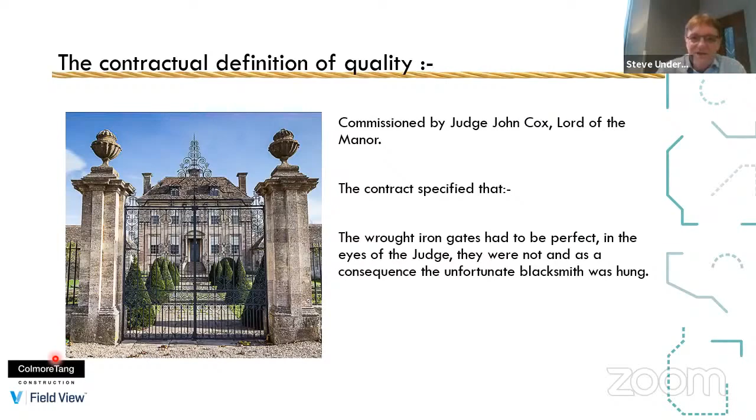So from my perspective, the real issue sits here, and that's this: the guy holding the hand tools that actually builds the product is where quality and compliance sits. And there's the old phrase, the hand that rocks the cradle is the hand that rules the world. Well, I say the hand that holds the drill, all the tools, is the guy that really calls the shots when it comes to the quality assurance piece.

And if we think about the cladding crisis and the things that have started the golden thread, a lot of it is to do with quality of workmanship actually on the work face. And we can all talk about everything being done for the lowest price and people cutting corners and bits and pieces, and we'll come back to that in a bit.

But really, I believe that the quality and the golden thread exists at the workplace and not as a load of technical documentation. So back in my day, as a young site manager, I used to quite often go in on a Saturday morning, as most site managers did, and catch up with the paperwork. And I remember going into the office where the site engineer was, and he had inspection and test plans all over his desk, mainly for concrete, to be fair.

And on Saturday morning, he was busy filling in his ITPs. And these were pre-pour ITPs and post-pour and all the bits and pieces that go with it. So the entire quality assurance piece was just a straightforward tick box exercise. And this was kind of born out of the BS 5750 era, when everything was a check sheet. And the only thing that actually got done was the check sheets got ticked, but nothing got checked because everybody was so busy filling in the check sheets.

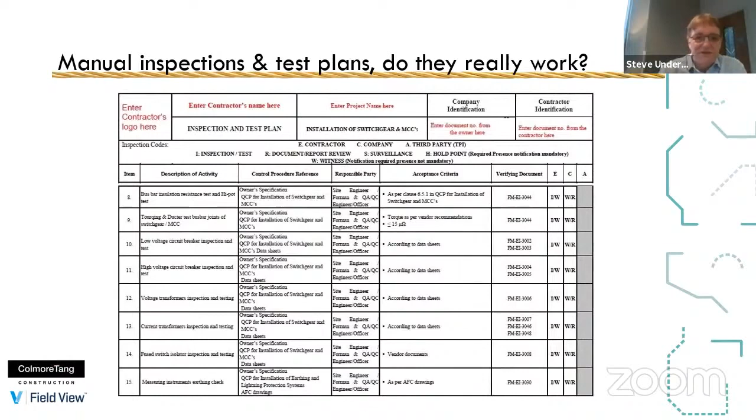And that was that. So how do we kind of move on from a check sheet philosophy to something that actually works, that means something to the guys on site? So if you think of any process, here's my alternative to 3 steps to heaven: you have to define what it is that you're going to do.

You then have to produce an algorithm, and it needs to be a visual flowchart so that everybody can understand it, because communicating what you're trying to achieve is as much the problem as anything else. From that, you can develop your inspection and test plans and define the hold points.

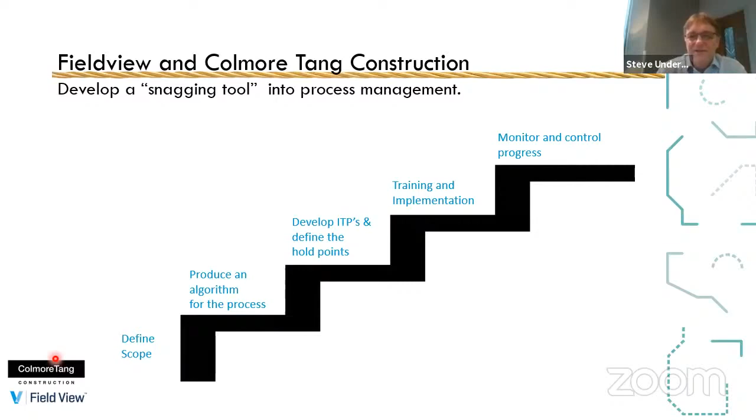Then the real key is you have to train and implement what you're doing. That is the key. It's no good having all of the golden thread stuff all over the place - it just becomes the Gordian knot. You actually need to train and implement the people doing the work. Once you've done that, you're into the monitor and control process, which is easy if you've got the data. So in true Blue Peter fashion, here's one we did earlier.

This project is just across the street from our office, at St Martin's Place. It's a job we built with a company called Creagh, who did all of the precast work - a proper pack of cards, Lego type building. We designed it and decided to do it that way because of all the problems we were having trying to deliver a quality product in terms of the external envelopes.

So we went right back to square one. We said, right, what's the initial design look like? Then we went to fabrication and mock-ups of the design. We then worked out how we could lay up the molds. The architect had to work with Creagh because we've got 4 or 5 different finishes within each panel, and those factory molds were very difficult to build in the first instance.

We then decided that we would install the windows in the panels off-site, not on-site. All these panels were built over in Northern Ireland and shipped over. So once Creagh had created the multifaceted panel, we gave it to Omar Windows to put their windows in - the window man had to put his windows in at their yard and then hand the panel back to Creagh.

We then did final checks prior to dispatching them, a delivery on-site inspection, then they were installed and temporarily propped. They were then re-inspected once they were grouted up with a permanent fix, and then we inspected and signed them off with all the mastic and the seals that go around them.

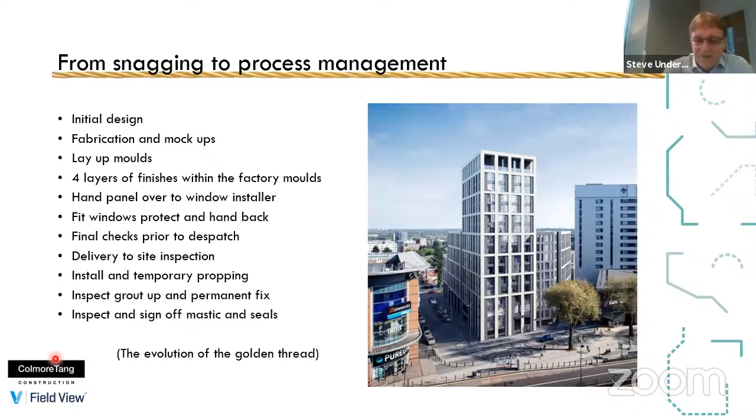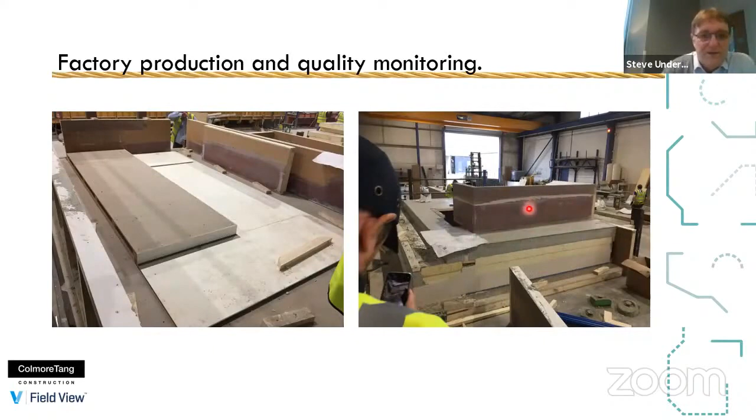Just to give you an idea around that process, this is the start of a panel being made - you can see the first layer being built up in the first picture over here. Then as the panel got more complicated, you can see the layers of panel as it all gets built up. All that was built over in Ireland.

Then we had the Creagh piece with the identification of completed panels and any defects associated with the panel, because fixing a panel in the yard is a lot easier than fixing it once it's got to site. All the panels were stacked up in their yards, and they had about 2 to 3 months worth of panels ready made so that we could ensure the delivery process was really smooth and we could deal with any kinds of delays.

That worked really well, and we're really fortunate that Creagh as a company decided the FieldView way of doing things was a good thing. Originally they were scared it was just going to be used as a tool to beat them up with. But once they saw what we were trying to do, which was actually have an open system, Creagh went out and bought FieldView themselves and now use it to do their own quality control.

So if people buy it because they want it, not because you're forcing it on them, that's very much the way to be. Once the panels had been made and cured, they were all stacked up ready for transportation. They had a yard about the same size as a football pitch that was full of, if you like, our panels. I think the project itself had something in the order of

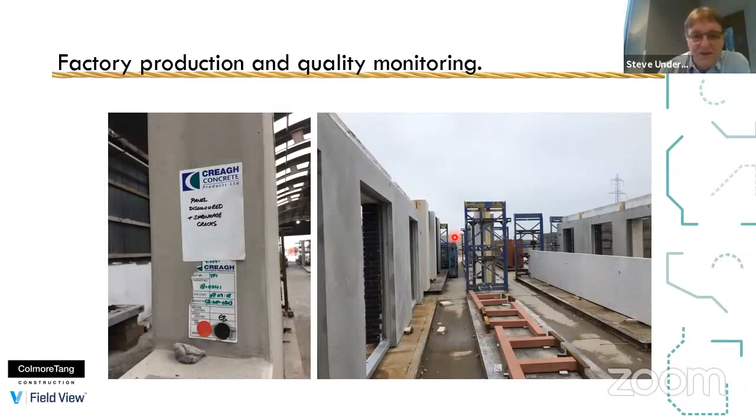So you haven't got all of the construction detailing to do here where it all tends to go wrong. So we're able to build our building using something which we knew had a high degree of compliance.

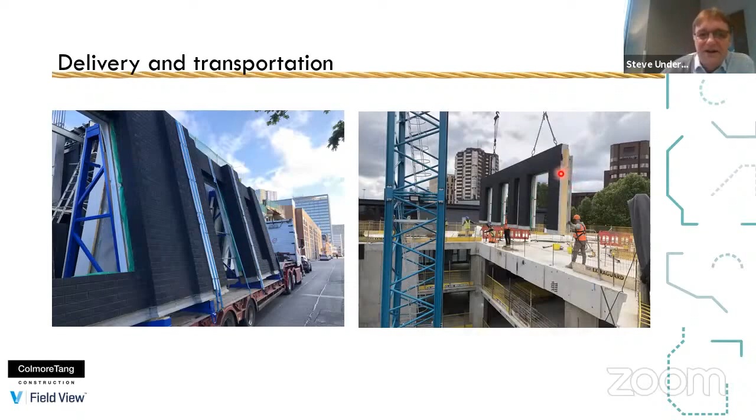So the next step was actually putting the thing together as a whole. We're building the panels up, and you can see the windows are in here. The guys are fixing the internal divides. Here's the temporary propping, holding the stuff up when they're lining and leveling the panels, working within their control zone with all their health and safety stuff. So as a system, it's really good. It takes away scaffold, and a whole bunch of stuff that's just a problem if you do a traditional masonry product.

On that one, we actually started the precast the week we said we would start it, and Creagh finished it the week they said they would finish it. So you had no extensions of time and no delays. It was really quick and really certain. I would recommend it to anyone.

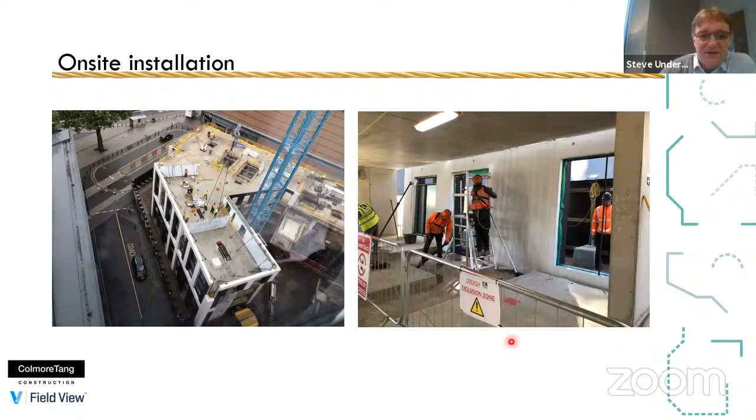Anyways, back to field view and the golden thread. These are examples of the ITPs that were just lifted straight off the file out of the job, because we've got a complete electronic record of the entire project from start to finish with the work that we did with Creagh. So in here is the Creagh panel being completed over in Ireland with the M&E slots and ducts done.

There's the tickets to say it was installed on site, and these are our guys' signatures. If you look in, you can see these little hyperlinks. These hyperlinks are where the photos link back to the database, so we know exactly where the picture was taken, when it was taken, and what it was of.

And so the process moved on. This is to prove that it wasn't all perfect. Here's an NCR where someone's identified a problem. So there's a picture of the problem, and there's a location of the problem.

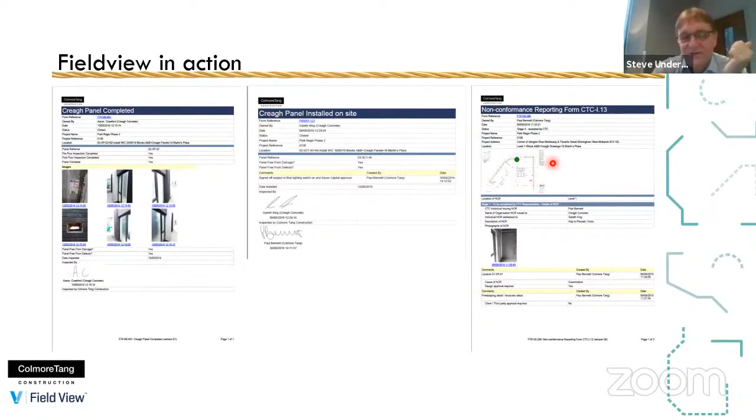So we actually have the management and control by the guys on site, and we gave every guy on site a tablet so they could walk around, take their photos and do the work without having to come back to the office and sit filling out bits of paper. You need boots on the ground, and this is the way to do it. Enable the boots on the ground to take the office with them and not have to come back, because when they're back in the office, they're not supervising what's going on.

So with all this data, and we have literally thousands and thousands of data points, we started to get through the field view process these waterfall diagrams, as I call them. It doesn't really matter what's on it, but what you can see is green and red squares, and what's hanging at the back. So you actually get a live picture of your product.

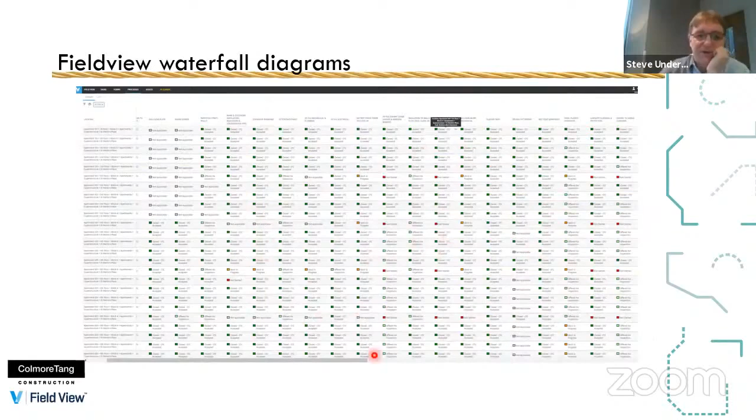So I'll blow one of those up for you now. There you go, and hopefully you can see that, which shows the location and the task. This is a fairly simple section of the whole process.

And what we then started to do with this, instead of just using it for snagging, the QSs suddenly woke up to the fact that they could use this as a valuation tool. So when we were doing our valuations, we were able to say upstream to our clients, this is what's been done, here are the records. And downstream to the subcontractor, we could say, this is what you've done, this is what is green, this is what we're going to pay you for.

So we didn't have any arguments or disputes around the work being done on site or interim valuations, because it was what it was. No arguments, no ifs, no buts. And that saves an awful lot of time and aggro and general messing about. So that worked very, very well.

The other issue that comes with this is that because the job was built in Northern Ireland, and a lot of the material value is in Northern Ireland, we were able to use this for the vesting applications as well. So the PQS, who didn't really want to go to Ireland to count panels in a field, was able to do checks on the individual components, because the materials off-site element of this project was absolutely huge.

So there's all the process that we went through and how we actually managed that, which links very closely to what we're going to have to do in terms of cladding remedials and following the golden thread.

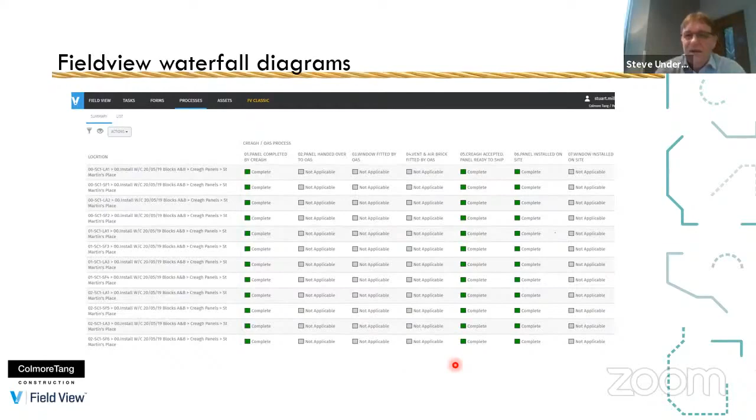But the real, perhaps, product of all this comes here: the difference and the distinguishing factors between quality assurance and insurance.

If you think about the latest bits on the BBC and other social media, where leaseholders are getting up in arms because they're copping for huge costs in terms of waking watches, temporary fire alarms, and now tenfold increases in building insurance costs, the value of the quality assurance you're able to provide for your finished building massively impacts the cost of the insurance policy that the leaseholder or freeholder has to take out to insure the building.

So you're now actually seeing value from assurance as a cost saving in insurance, and really speaking, this is the only way forward. So if we take that as a reasonable given, better quality assurance through the golden thread should mitigate the insurance catastrophe that's about to unfold. How that's going to be resolved is anybody's guess.

My take on it, just as an opinion, is that probably the government are going to have to stand behind the second level insurance of the original insurance companies, so that normal claims will be dealt with through insurance, but the whole Grenfell Tower disaster of a building actually burning up completely would be backed by the government. That way they could probably maintain insurance policies at something reasonably economic that leaseholders could actually afford. But something's got to be done around that.

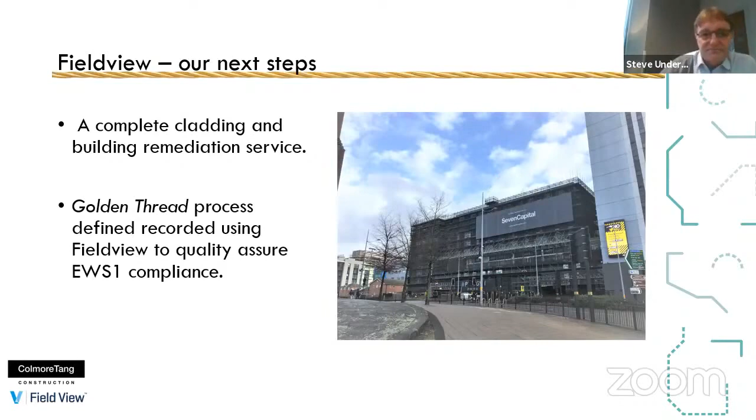What we've actually done is started to produce something which is a bit more complex, because we're finding issues now that managing agents, fire consultancies and leaseholders - a whole disparate community - all have a problem that no one seems able to tie up. So maybe the golden thread actually is a lasso around which we could use to pull the whole thing together.

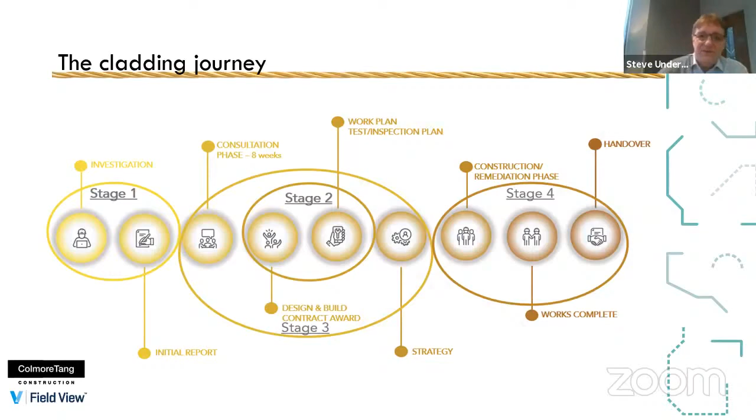So we worked some more on the actual process, and we came up with something a bit more comprehensive, which we could share with the leaseholders, the freeholders, and the managing agents. We've spent the last probably month and a half talking with managing agents, leaseholders and freeholders about how we can actually speed up the entire BSF process.

And the process has not really been helped by the stages necessary to go through to procure funds. You've got stage ones and stage twos, and the deadline, which was sort of artificially imposed in my opinion, back just before Christmas, where everybody had to get funding bids in. The problem with those funding bids was that they did not have anything like the level of detail or information needed to make it a comprehensive price.

We're now seeing issues where precursory funding bids only represent probably 25 to 30% of the actual cost. So with the furore around Section 20 agreements, costs are going through the roof, but it's not that costs are going up. It's that the costs were never really identified in the first place.

What we're finding as we look at the projects is that the cladding remediation piece, the actual pure piece of the work, is probably only 25% of the actual cost of the job when you add in all the logistical challenges and the fact that you've got to take it apart to put it back together. And that doesn't include the costs you might get if you had to completely decant a building.

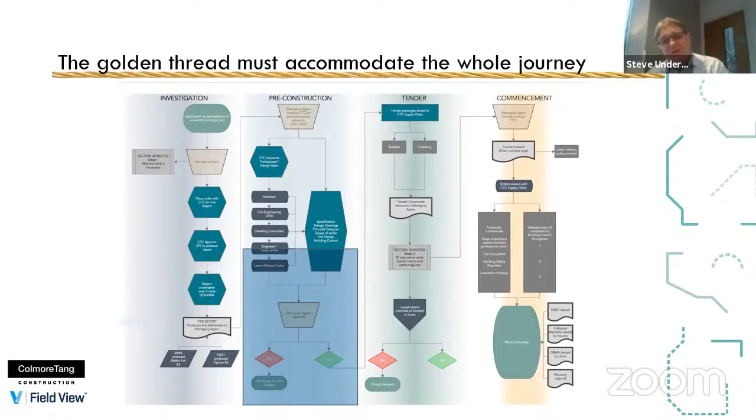An easy question please - John Griffiths has asked, are the field view sheets linked back to the BIM model? Not at the moment, but they can be, and that is perhaps the next step. When we've got a fully integrated BIM model, we can link field view and the sheets back to it. We've almost got it by default in that for the building across the street, we did a large Navisworks Revit model to actually do all of the panels. So it would be a fairly small step to get BIM 2 or even nearly BIM 3 compliance just by spending a bit more time working it through.

John has also asked, was the valuation process automated or a manual process using the field view process sheets? We had schedules for all of the individual panels, so in many ways it was a count of panels, tick the completed box to get the answer. Because of the way the panels are made, and there's a large upfront cost in building the molds, which is not part of the field view click process because they are very much bespoke items. Once you're into laying up and building molds, yes, we can do that.

David Stevens has asked, did the QA sheets link to the programme to provide progress? Yes. We used Asta Powerproject - I think it's got a new name now, isn't it? The software, is it Elecosoft or something? And we linked the two together so that our planner was able to update his programs using the waterfall diagrams. And that worked really, really well.